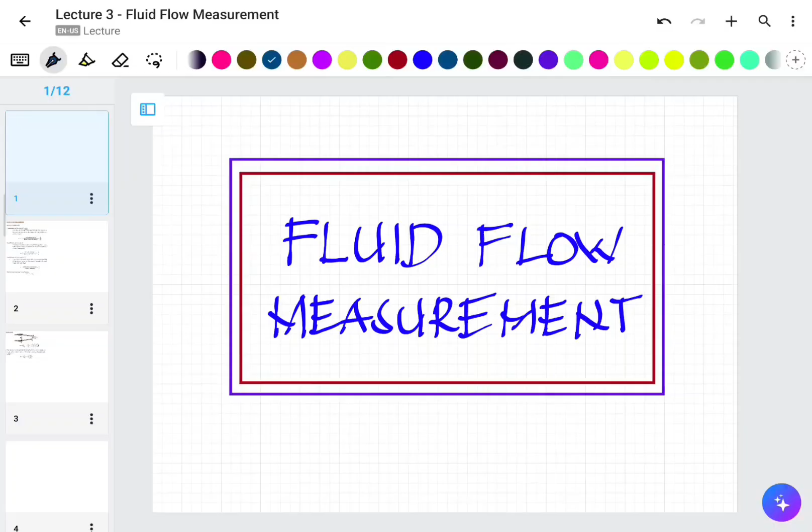For today, we're going to focus on the orifice, which is one of the many measuring devices that we use in hydraulics or fluid mechanics in general. So let's start with the concept of the coefficients, or what we call device coefficients.

First, we have what we call the coefficient of discharge, denoted as C sub D or just C. This is the ratio of the actual discharge through the device to the ideal or theoretical discharge, which will occur without losses.

Remember, when we discussed Bernoulli's energy principle or theorem, we had this key takeaway: when we talk about theoretical discharge, it is a theoretical formula, without head losses. So it's the same thing here; the Bernoulli's energy theorem applies also. That is for the coefficient of discharge.

Next, we have what we call the coefficient of velocity. Similar to discharge, it's the ratio of the actual velocity, or the actual mean velocity, to the theoretical velocity, which will occur without any losses as well.

So that's why, with the coefficient of discharge, let's go back a little bit. That is Q over Q sub T. Actually, if we want to denote this one specifically, we can also write it as Q sub A over Q sub T. So that means actual over the theoretical.

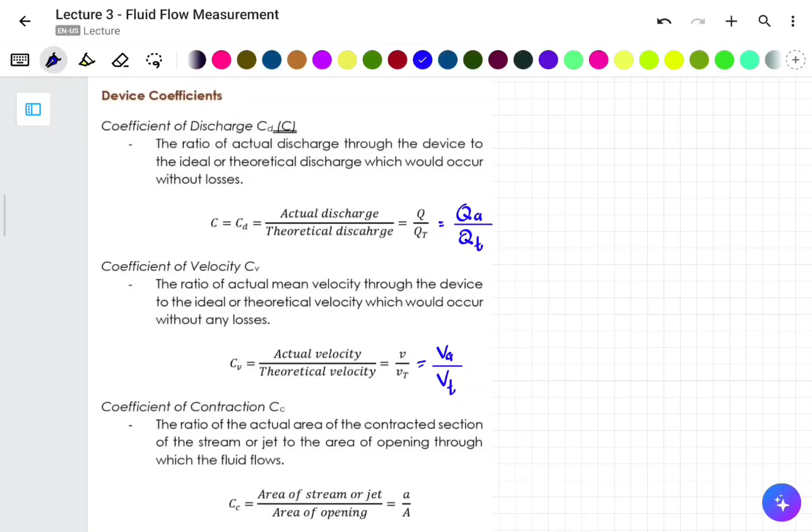So we also have the coefficient of contraction. In this case, what we are dealing with is not the actual versus the theoretical. We are dealing with how the device contracted from one point to another, and that's why it's called the coefficient of contraction. Usually, it's the ratio of the actual area of the contracted section of the stream or jet.

It's the ratio to the area of the opening through which the fluid flows. So this has to do with the area of the stream or jet, to the area of the opening.

So, area of the stream or jet, over the area of the opening. Usually, the area of the opening is much larger in relation to the area of the stream or jet. Later on, we'll discuss why that is.

So we have what we call the vena contracta, where, because of the pressure, the area becomes smaller first, then it becomes larger again at the stream or jet. That's why the smaller area, denoted by lowercase a, is over the larger A, which is the area of the opening of the device.

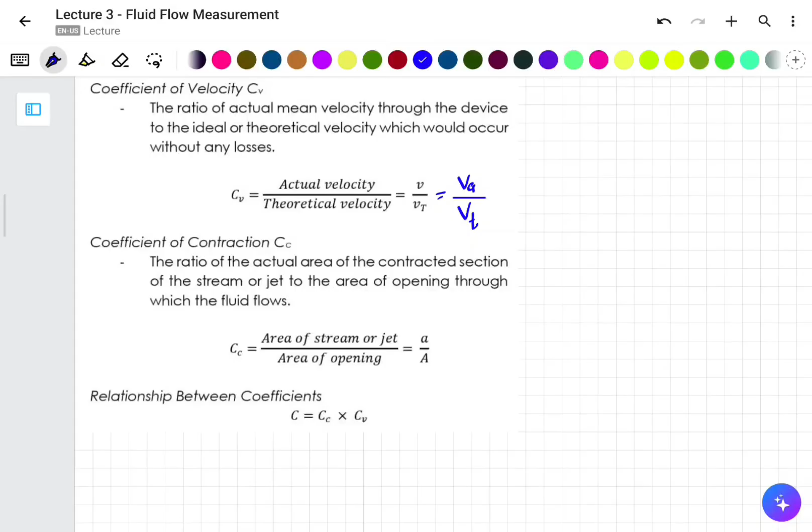So the relationship of these three—the coefficient of discharge, coefficient of velocity, and coefficient of contraction—can be denoted by this equation: C sub C times C sub V is equal to the coefficient of discharge. Actually, this comes from our concept of discharge.

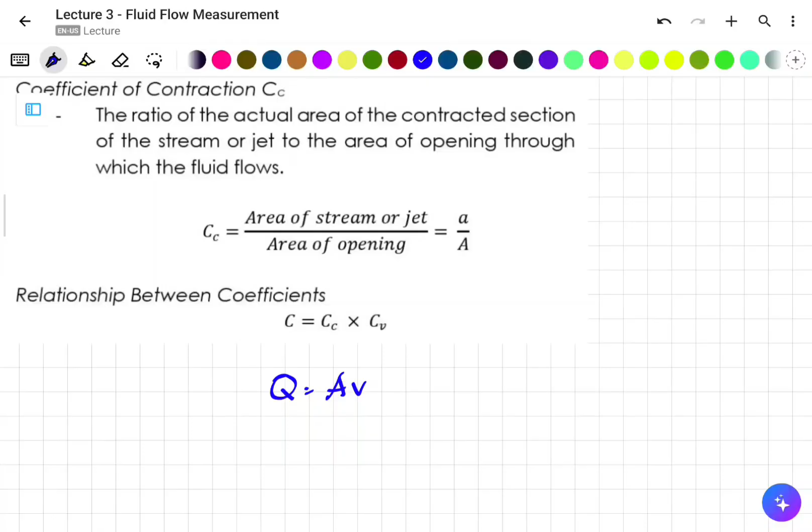What is our discharge? Remember, discharge Q is equal to the area multiplied by the mean velocity. So if you're dealing with actual over theoretical, that is the ratio. So if this is your discharge, remember this is the discharge.

This is discharge. So this one is the area, and this is the velocity. So if we're going to deal with the actual over the theoretical, we will have this.

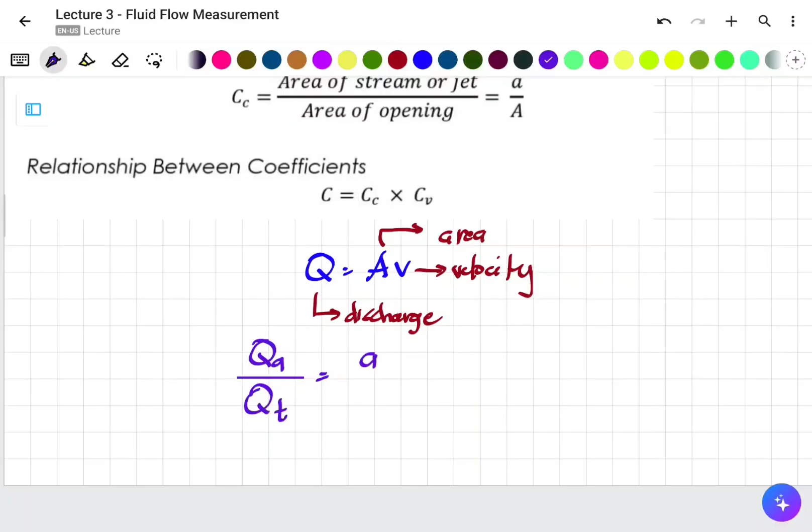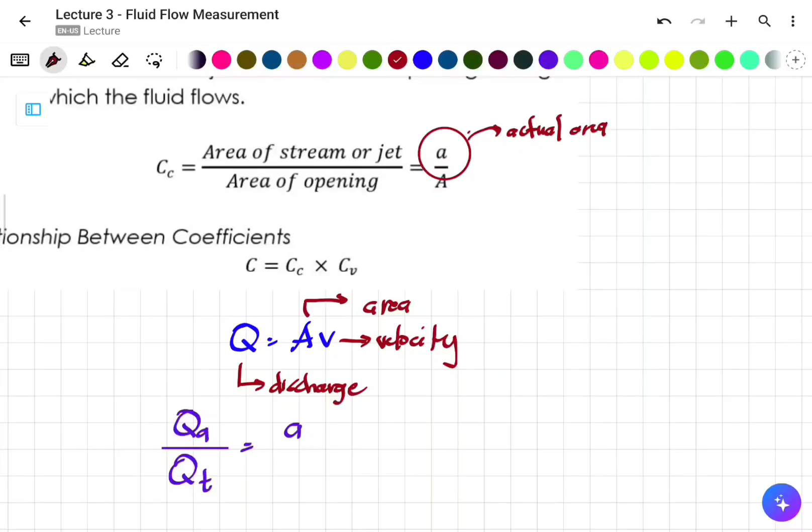Actual discharge over theoretical discharge is equal to the area. What we're dealing with is the stream or jet. The area of the stream or jet is the actual area, but it's not really the actual area—what we're talking about is the area of the stream or jet, the thing that's actually flowing, over the area of the opening. So that's multiplied by the velocity, which is actual velocity over theoretical velocity.

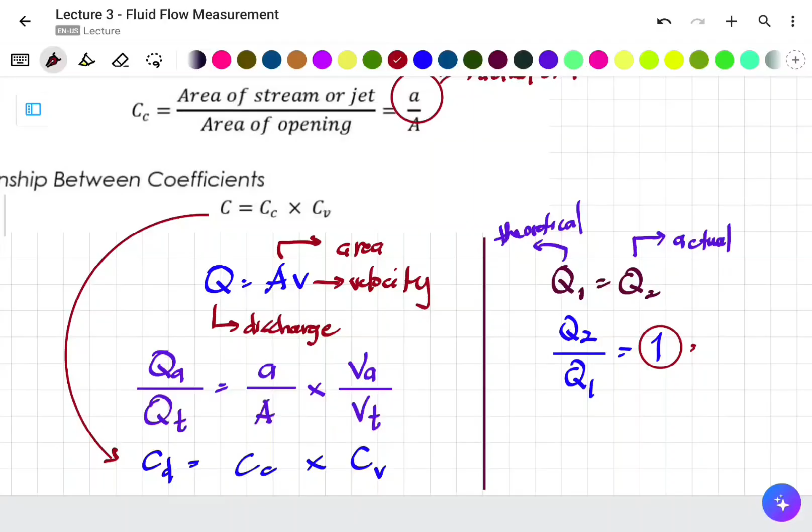So if we're going to use the equality, what happens is this: Q sub 2 over Q sub 1. Dividing both sides by Q sub 1 is equal to 1. However, this equals 1 only if the actual is equal to the theoretical. But because there's variation in the flow, what happens is this is the actual over the theoretical, but it's not always equal to 1. That's why we have a coefficient.

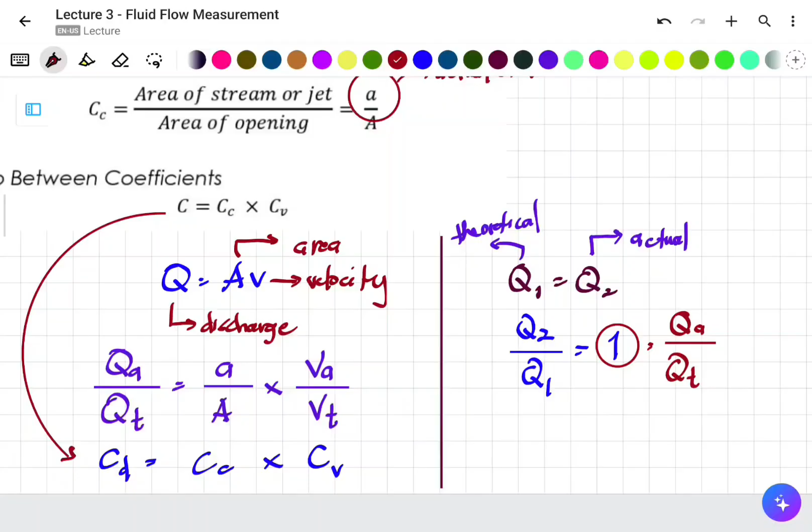But in this case, since we're dealing with the actual flow, this is critical for us civil engineers, or engineers in general, to analyze the actual scenario of the flowing fluid in pipes—especially if you're going to specialize in water resources engineering. So you need to know that. We all know that.

So that is the first part of our discussion, which is the device coefficient. Let's continue our discussion.

When you say head loss—from our discussion on fundamentals of fluid flow, we know that head loss means there's the presence of friction. On the other hand, without head loss, there's no friction. That's why when we talk about Bernoulli's theorem without head loss, we're dealing with theoretical or ideal flow. In this case, we already have the formula shown here.

This is the formula for head loss. Actually, you could use this directly, but for the sake of discussion and concepts, let's analyze this illustration. Let's take this as, for example, the flow of the fluid. Head loss can be applied to different measuring devices like the orifice we'll discuss today, venturimeters, tubes, and nozzles. So we can use this head loss formula.

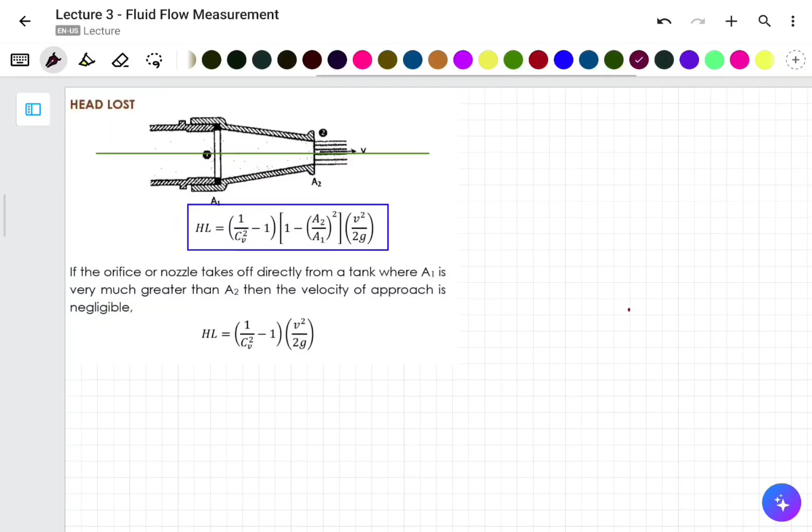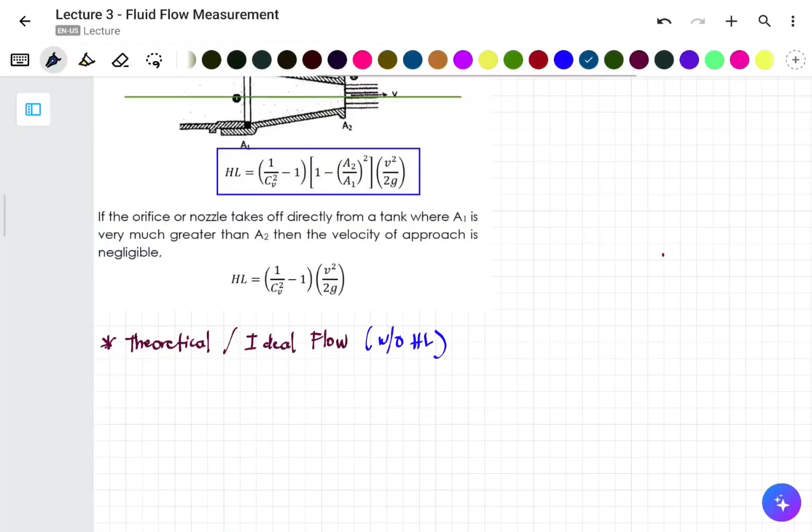However, for us to easily understand this concept, let's go back to the concept of Bernoulli's theorem without head loss. We know from our previous discussion, when we talk about theoretical or ideal flow—that's what we discussed last time. We know that this is without head loss, or frictionless.

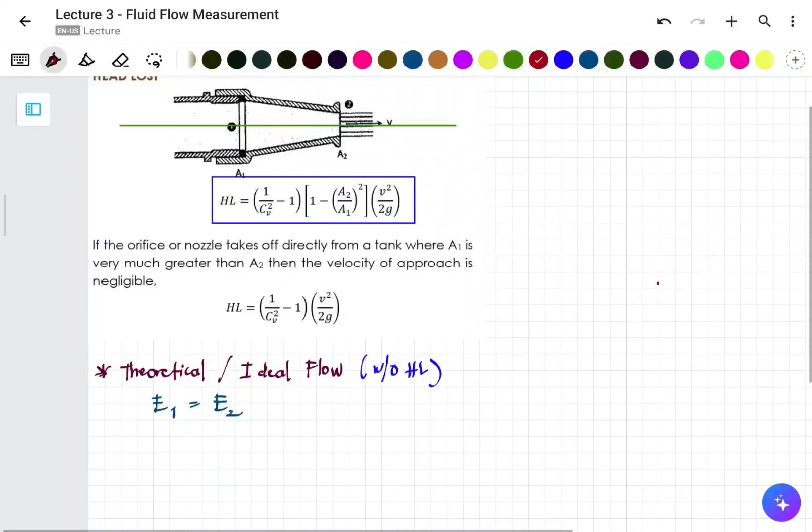Pero yung point 2 dyan, actually mukhang nasa labas na, no? Parang palabas na. So kahit pantay sila, let's say pantay yung datum nila, wag muna natin i-negate o wag muna natin tanggalin, no? Isulat muna natin parehas o both sides.

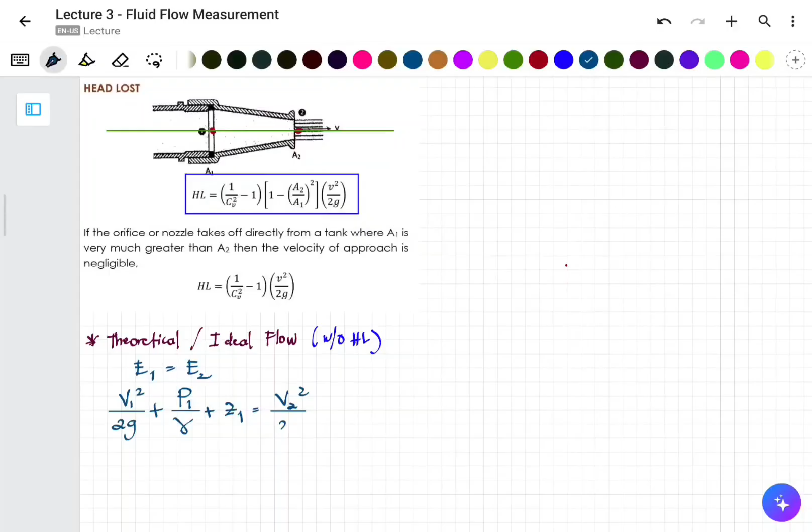Okay, so ano nga ulit yung equation kapag ganito, no? So this will become V sub 1 squared over 2G, plus P sub 1 over gamma, plus Z sub 1 is equal to V sub 2 squared over 2G, plus P sub 2 over gamma, plus Z sub 2.

So yung elevation o elevation energy head, wag muna natin i-cancel out, kahit alam naman natin, you know, pantay sila. Wag muna natin i-cancel out kasi pwede kasing hindi ganon, no? Pwede hindi ganon, okay?

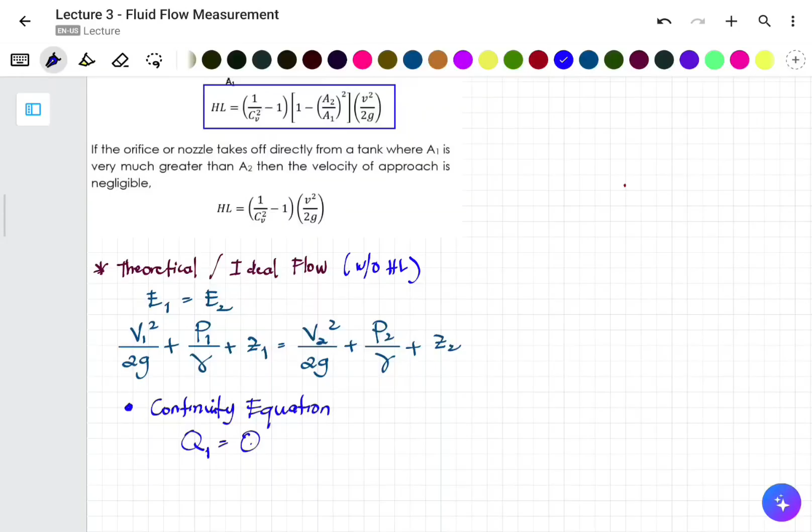So, but we know, from the continuity equation, so let's go back a little bit from our previous discussion. From our continuity equation o continuity principle of fluid flow, we know that whatever enters the system is the same amount that leaves the system. Okay? So alam natin yan.

And that is true volumetric flow rate. So if that's a volumetric flow rate, that is A sub 1, V sub 1 is equal to A sub 2, V sub 2. Okay?

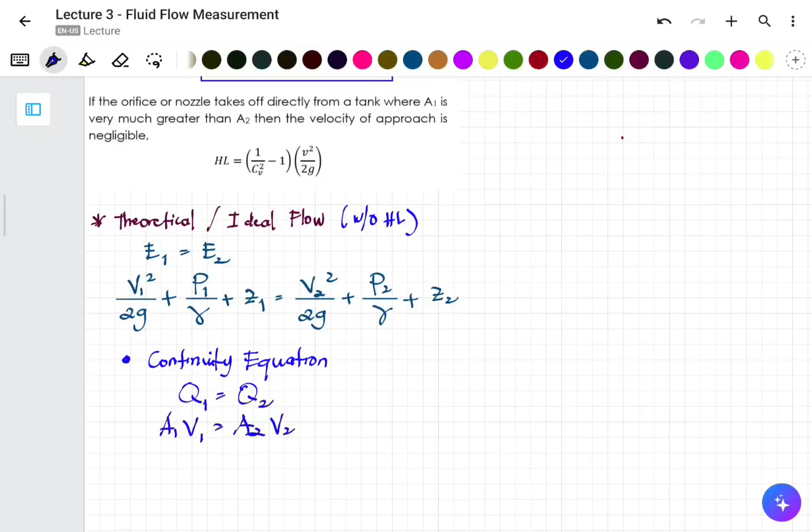So in this case, we want to see o we want to know the value of V sub 2. Ang dahilan, itong V sub 2 ay magiging indicating factor para sa ating discussion. Itong point 2 na to, dito natin ma-analyze kung ito ay actual, o pwede rin natin tanungin kung ito ay theoretical.

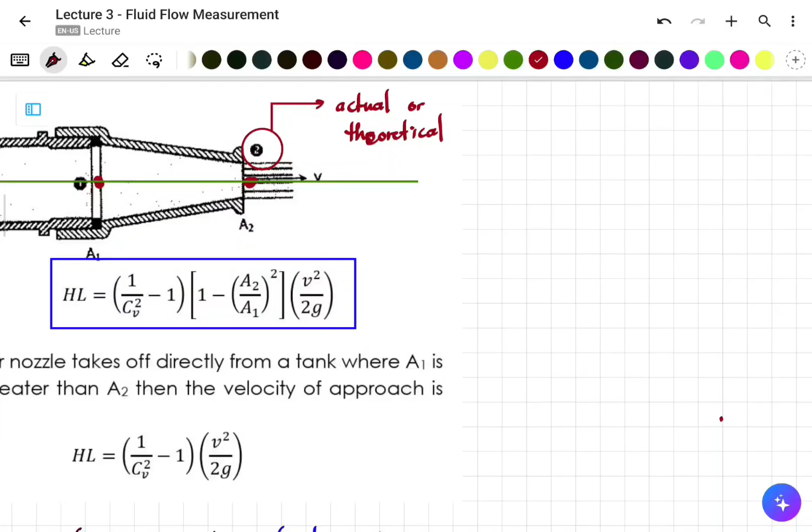Dito naka-base, no, yung ating ina-analyze. So syempre, palabas sa system. Okay, so yun yung importante naman, di ba? We know that from our discussion on continuity, meron tayong concern sa amount na nalalabas. Kaya nga we are dealing with volumetric flow rate, mass flow rate, or weight flow rate.

Okay, so balik na tayo dito. So if that's the case, let's have the ratio, o let's take from this equation the value of V sub 1, kasi yung V sub 1 natin nandun sa system. So this will become A sub 2 over A sub 1 times V sub 2. Ito yung ating V sub 1 na value.

Okay, so substituting natin dyan sa equation na to, lalabas, no, kung i-simplify natin, kung naka-squared yon at itong buo na to, di ba, itong buo na to yung inyong numerator. Nakita nyo ba yon from our equation na to? Kung buong yan yung numerator natin, squared natin yan.

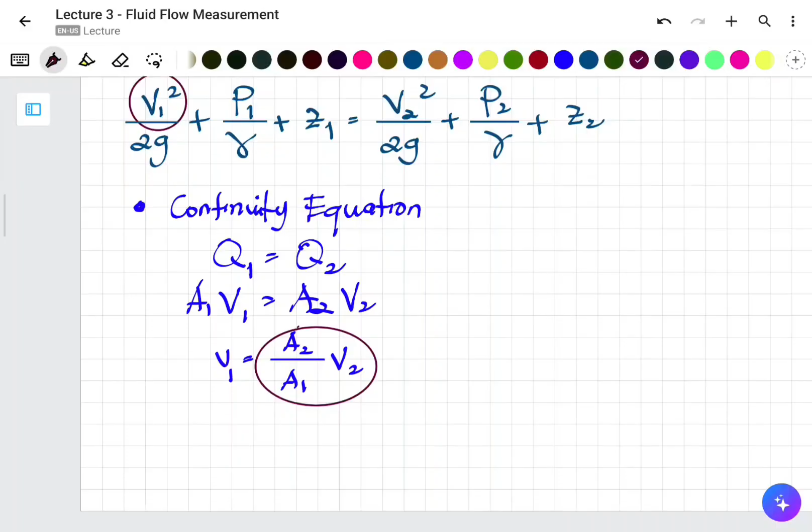So that means lalabas, this will become, i-simplify na lang natin. This will become A sub 2 over A sub 1, naka-squared. Okay, ayusin natin. Naka-squared. Then multiplied by V sub 2, V sub 2 squared over 2G. Kasi ang square lang naman natin yung etong A sub 2 over A sub 1 times V sub 2.

Then tuloy lang yung equation plus P sub 1 over gamma, plus Z sub 1 is equal to, yun pa din, no, V squared over 2G, plus P sub 2 over gamma plus Z sub 2. Ayan yung ating equation na gagamitin. So again, this is for the theoretical or ideal flow.

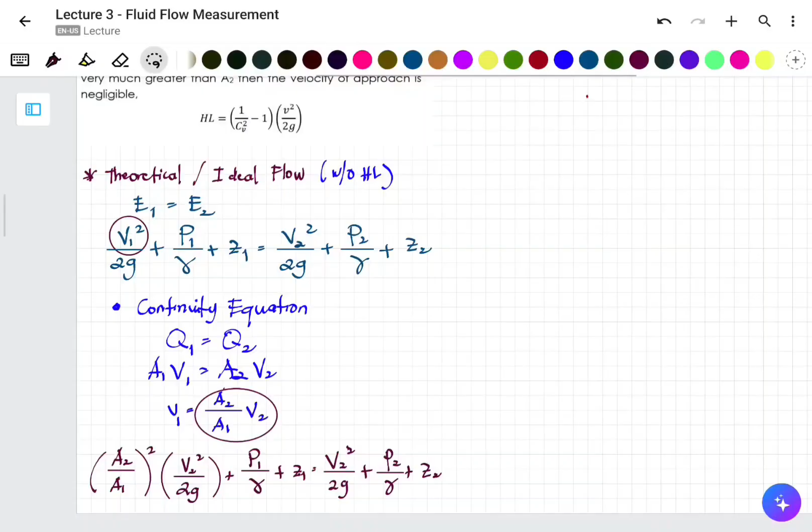So pwede natin gawin, i-simplify natin itong equation na to. So sige, dalhin na lang natin siya dito sa bandang taas. Okay, para medyo maayos. So ituloy natin, gawin natin, pagsamahin natin yung pagkakamukha, no?

So lalabas, pwede ba natin gawin ganito? Isulat muna natin. So this will become V sub 2 squared over 2G, minus ito, no? So this is A sub 2 over A sub 1 naka-squared multiplied by V sub 2 squared over 2G, is equal to, since pinagpalit ko, lumabas parang pinagsama-sama ko yung like terms. This will become P sub 1 over gamma, plus Z sub 1, minus P sub 2 over gamma, minus Z sub 2.

So by regrouping and factoring the variables, pwede natin i-simplify ito further by writing into this form: V squared over 2G, V sub 2, multiplied by, ano yung naiwan dito? This will become 1 minus ito, yung naiwan, so A sub 2 over A sub 1 squared.

Okay, yan yun. Then is equal to, so pwede natin i-factor out yung P sub 2 minus over gamma, minus Z sub 2. So this will become P sub 1 over gamma plus Z sub 1. Anong ulit to? So this is potential energy, kaya hindi ko na pinag-iwalay.

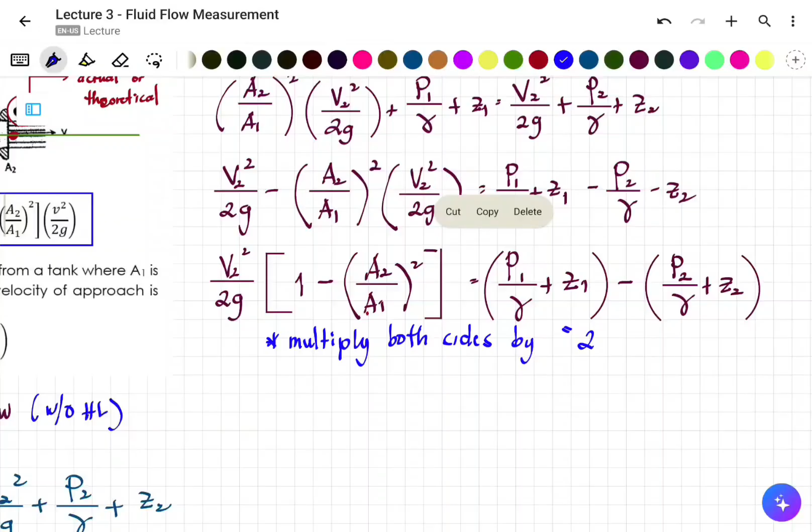Final na ba? Ano ba yung kukunin natin ulit? V sub 2. So kung i-simplify natin to further, multiplying both sides by 2g. Ano pa yung gagawin natin? Una, we're going to multiply both sides by 2g. Ano pa? Divide both sides nito, divide both sides by yung 1 minus a sub 2 over a sub 1 squared.

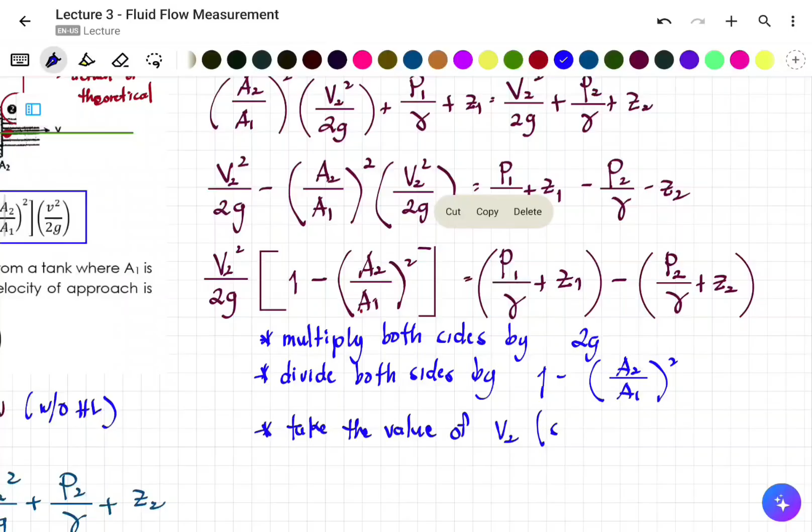Ano pa? So kapag na-divide na natin both sides at na-multiply natin both sides, nung value na kailangan natin, ganyan na natin to. So kapag na-multiply na at na-divide na, kunin natin yung square root. So take the square root. Take the value of V sub 2 by using square root. So ayan yung ating mga gagawin. Kapag sinunod natin yung steps na yan, ganito na mangyayari sa equation natin.

So this will become V sub 2. Gawin natin kulay, parang maroon. V sub 2. So this V sub 2 is your velocity. Take note, this V sub 2 na makukuha natin is a theoretical velocity. Why? Because we're using theoretical and ideal flow.

So anong ginawa natin? Both sides by 2g. Mamumultiply ng 2g, then madidivide both sides nito. So pwede ba ating gawin na ito, lalabas ito na 2g over 1 minus a sub 2 over a sub 1 squared, multiplied na ito sa ating P sub 1 over gamma plus z sub 1. Naka-multiply pa pala ito ng buo.

Minus P sub 2 over gamma plus z sub 2. Pero naka-multiply yan dun sa ginawa natin, sa 2g, and naka-divide sa yung mahabang equation na yon. Pero may square root, wag kalimutan. Mahabang square root. So ito yung ating theoretical velocity. Take note, itong kinompute natin, this is our theoretical velocity. Why? Because we use theoretical and ideal flow ng ating Bernoulli's energy theorem.

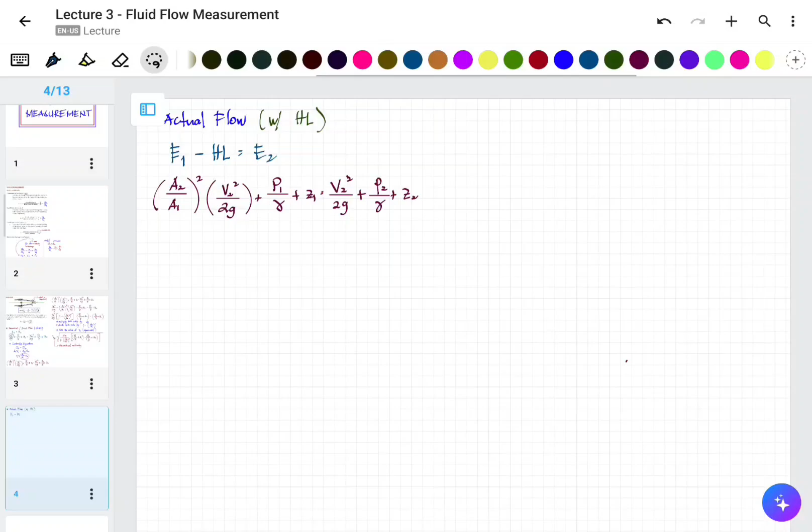So pag i-simplify ulit natin, lalabas ito rin yun, pero usod natin, gawin natin kulay na to, blue. Pero kailangan meron siyang... okay, merong head loss. So minus head loss is equal dyan. Diba yun yung ating equation? So by simplifying further, mangyayari, ganito din pala.

So lalabas dyan. Paano mangyari? Pag nilipat natin sa kabilang side, ito rin, ito din pala yun. Same na same. Ilagay natin to. Same na same, so ito rin pala. Kunin natin to. Same na same. Same approach. Kinuha ko na lang para parehas na parehas.

Ang problema, yun nga lang, mukhang may madadagdag doon sa ating equation. Ano yun? Ating kulay blue para magkaiba. So mangyayari is magkakaroon dito ng minus head loss, dito rin minus head loss. Ayan na yun, actual flow na yan with head loss na. So ganun ulit, same procedure, ito pa din.

Multiply both sides by 2g. Divide both sides by this value and getting the square root, para ma-simplify natin yung V sub 2. In this case, yung V sub 2 naman na kinocompute natin dyan is actual na. Actual V sub 2. So mangyayari, kunin ko lang din to.

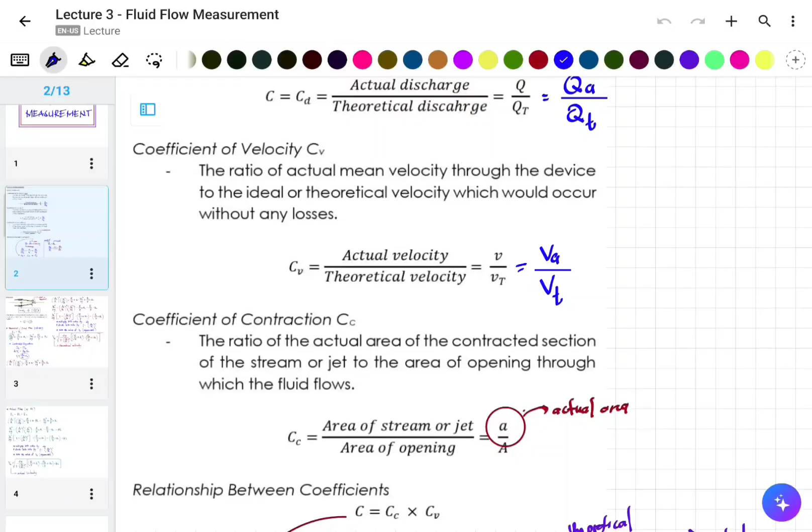Okay, medyo madugo yung ating calculation. However, if you still remember sa ating kaninang pinag-usapan, balik tayo doon. We know that the ratio between the actual velocity and theoretical velocity is what we call the coefficient of velocity. Since we are dealing with measurement and we are dealing with coefficients, gawin natin is from our coefficient.

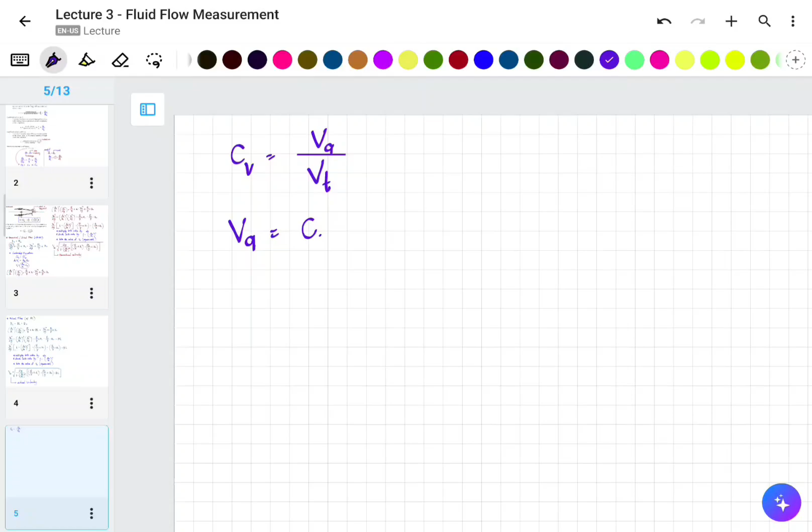C sub V is equal to actual over theoretical velocity. So para makompute natin yung head loss, gawin natin, V sub A is equal to C sub V multiplied by theoretical velocity. Di ba meron na tayong values nun?

Kunin natin dito. Ito, gawin natin itong red na V sub 2, this is your theoretical. I-write na lang natin dito. Yan, paste. So this is your theoretical. Medyo usod natin lang. Then kunin natin yung actual. Ito.

Palitin natin to sila kasi masyadong malaki. So yung red, na writing, yan yung ating theoretical, at yung ating blue, yung ating actual. So paano natin ito i-represent para medyo madali nating tignan dun sa ating problem.

Ngayon, i-denote na lang natin na yung ating actual. Maglagay tayo ng note dito. Yung designation natin actual, gawin natin siyang V na lang, and this is your actual velocity. I-denote na lang natin ng ganyan para mas madali sa atin, kasi pag medyo may letter, baka malito. So gawin natin is, alam natin ito, theoretical - sorry, this is your actual, and this is your theoretical.

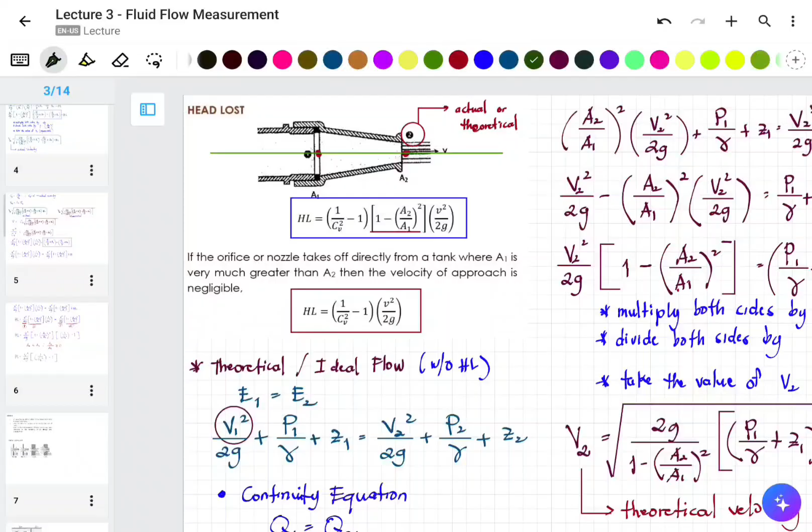Okay, so that is for our discussion on head loss. Now let's discuss orifice.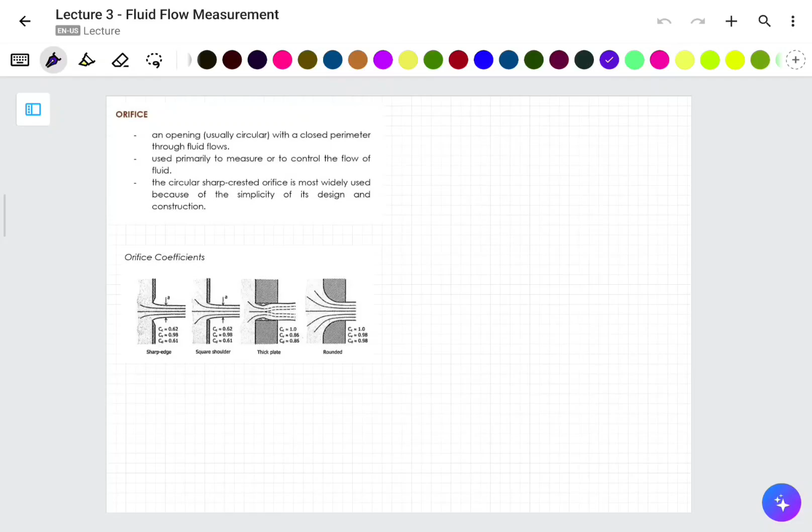The widely used type of orifice is the sharp-crested or sharp edge orifice. Here you can see their coefficients: C sub C, C sub V. They're not exactly equal, but approaching 0.62 for coefficient of contraction, 0.98, and coefficient of discharge is around 0.61. These are not constant values.

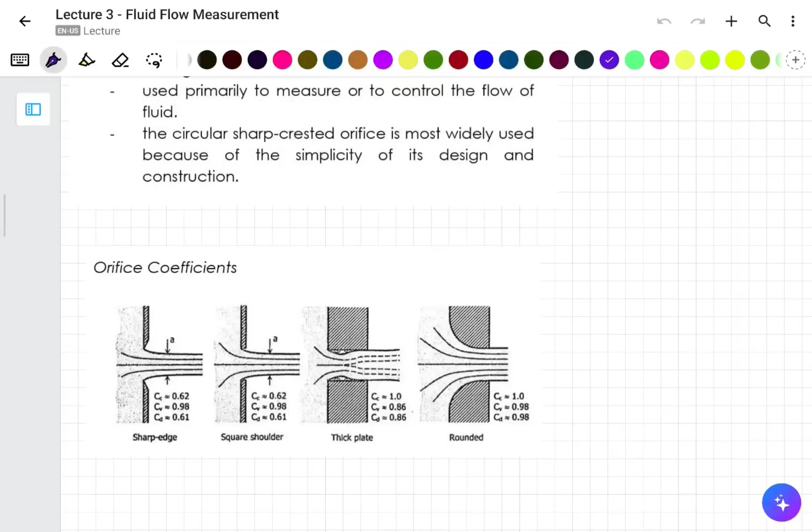There are corresponding diameters, and studies have been made proposing tables of values, but as I've said, these are not constant — they can change. Eventually, those values will still conform to our continuity equation, Bernoulli's energy theorem, and can be measured through pressure differences using a piezometer and manometer. Either way, we can use the concepts we discussed, which are the head losses and the coefficients.

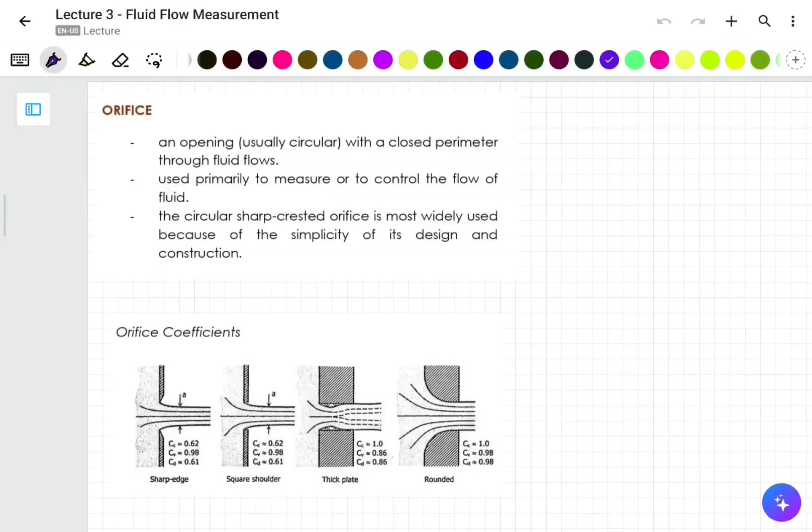So those are our orifices, and this will be one of the measuring devices we focus on, aside from the venturi meter, tubes, and gauge, which will be discussed later as we go along with this topic.

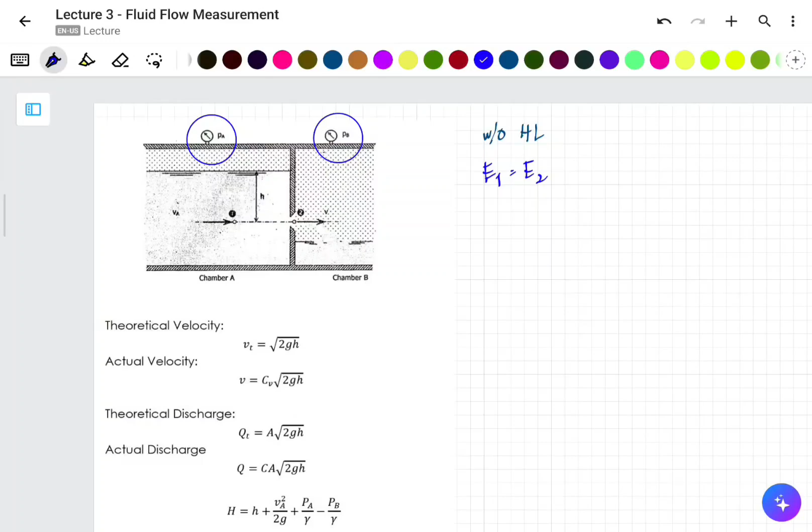However, there's a presence of pressure. We have pressure readings P sub A and P sub B because this is a chamber setup, with presence of air or gas above the fluid. There's also a height difference from the free surface down to the portion of the orifice, at point 2 of our analysis.

Considering that setup, let's write our usual equation: V sub 1 squared over 2G, plus P sub 1 over gamma, plus Z sub 1. Since it's equal, it's the same, just with different designations. Let's define this as we compute for the possible values we can find from this problem.

In this case, as shown on the left side, we have theoretical velocity, actual velocity, theoretical discharge, and actual discharge. Let's derive these. From this setup, let's consider point A as point 1 — so this is our point 1, located at point A.

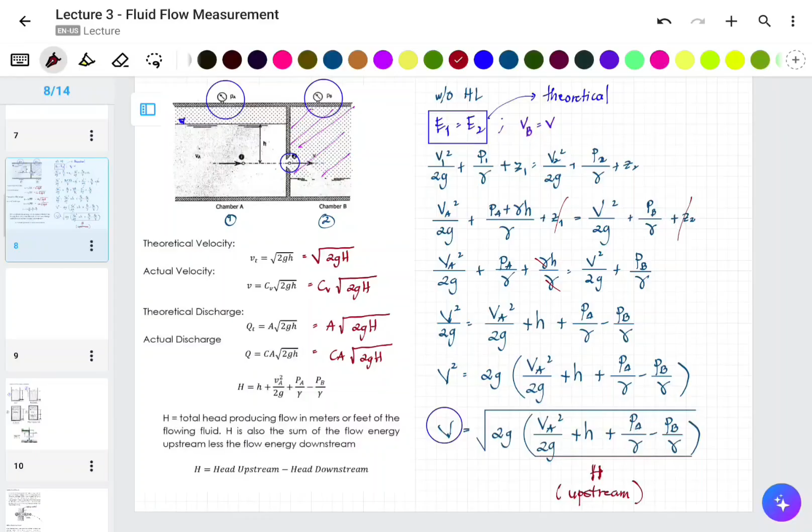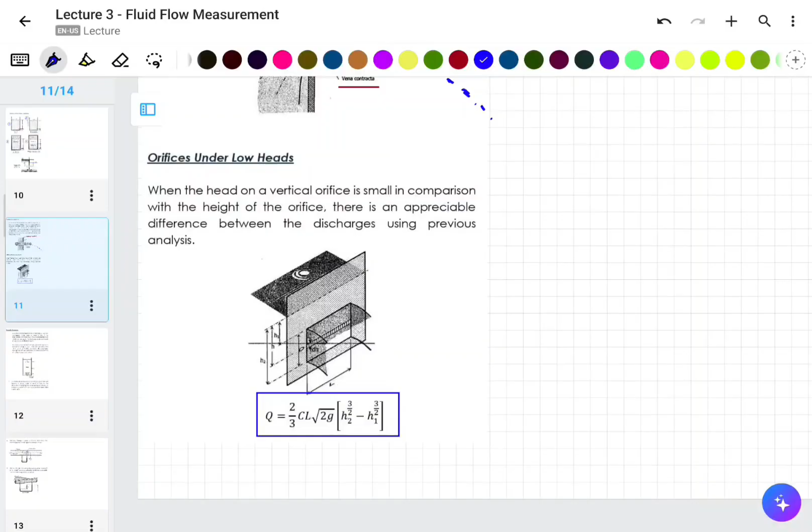So may nagkakaroon ng maliit na difference sa solution. Dito pinakita kaagad ang formula kapag orifices under low heads. Ito na yung formula, parang katulad nandun sa inyong head loss. Pero paano na-derive yan, yung equation na yan? Titingnan natin yung figure, ibabangga natin sa concept na meron tayo.

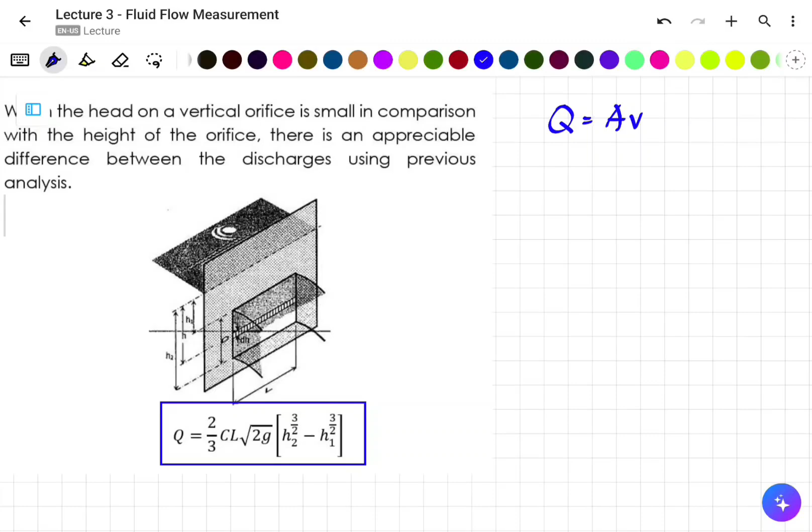Kung naaalala natin sa ating discussion, Q is equal to AV, ang volumetric flow rate. Since dealing tayo sa appreciable difference, magkakaroon ng differential values. Kaya gagamitin natin dQ is equal to dAV.

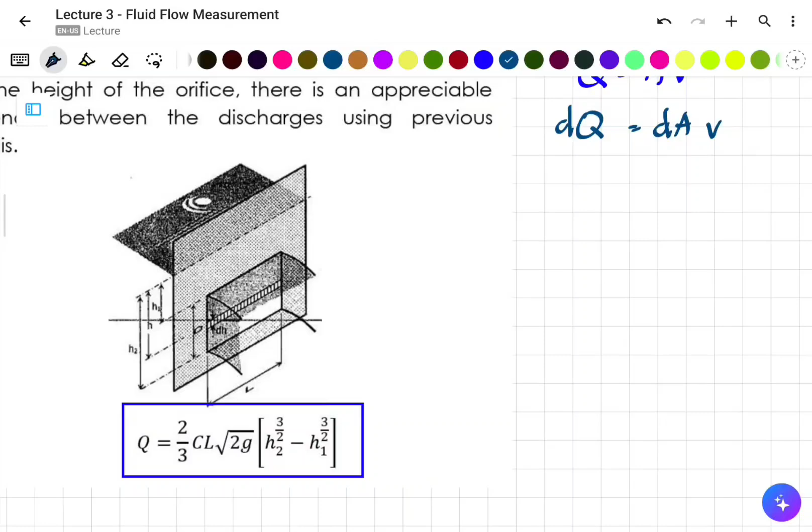Nakadepende ang inyong discharge sa area, which is evident dito. Nakadepende yung discharge dun sa area. Pero yung area na tinutukoy natin dito ay ang area caused by the length ng orifice, itong butas na to. Then the height difference ng dalawang fluid, nakikita niyo yung H1, H2, at so on.

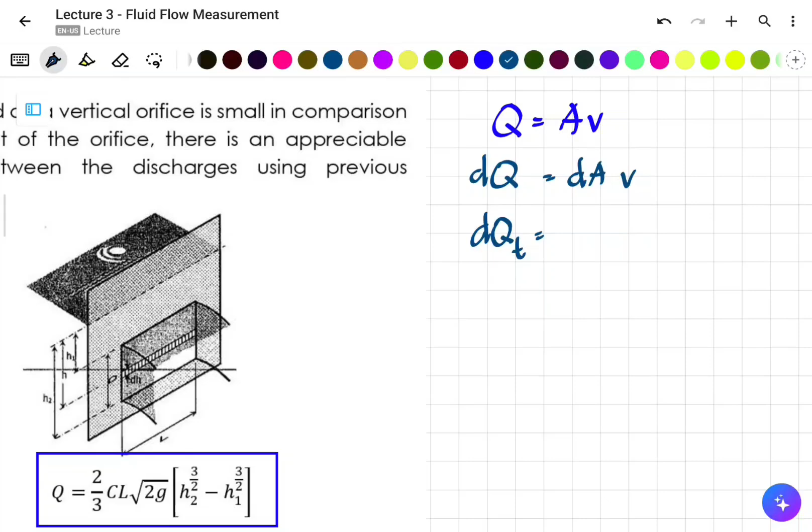So mangyayari, gawin natin itong theoretical (T) kasi wala tayong nilagay na head loss. Sabi natin yung A ay length times the height, pero sa case na ito, length times the difference in height, kasi appreciable difference between the discharges or height ay small in comparison with the height of the orifice.

Ito yung binanggit ko kanina. Kaya nagkakaroon tayo ng difference in discharges which is caused by this comparison of height. So yung V natin, which is theoretical, ay square root of 2GH. Maliit lang kasi yun yung ginamit dun sa illustration natin.

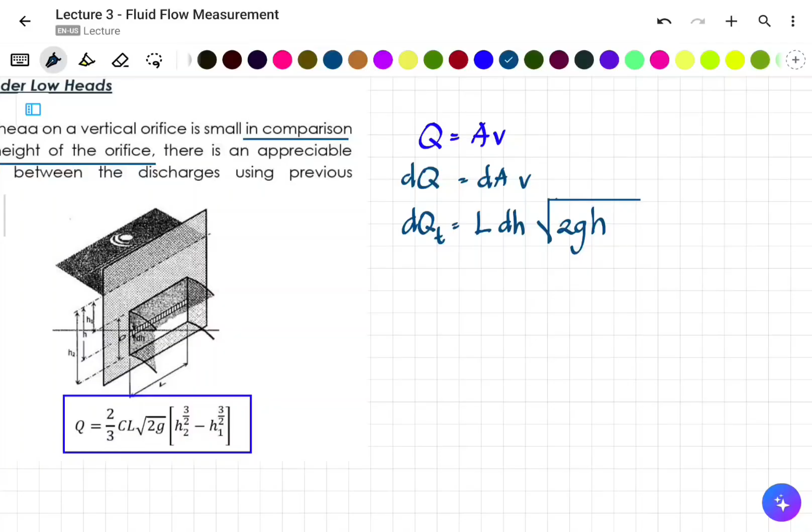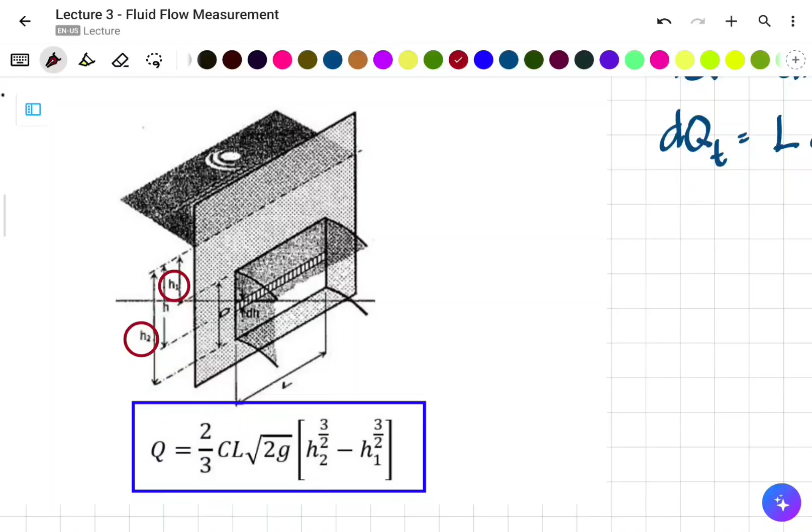Okay, paano to ngayon? Kunin natin, let's take or operate from limits natin, from H1 doon sa umpisa, kasi yung sa kabilang side papuntang H2, mas mababang level. Nakikita ba yun? Ito, H1. Papunta doon sa mas mababang level na H2 sa kabilang side, parang kasi siyang isometric, medyo may thickness, naka-3-dimensional yung ating drawing.

So let's simplify. Ito magiging dQt, kasi differential. Gawin natin L, tapos square root of 2G - iwalay na lang natin, times square root of 2G. Tapos H raised to 1/2, times dH. So may i-integrate na tayo nito.

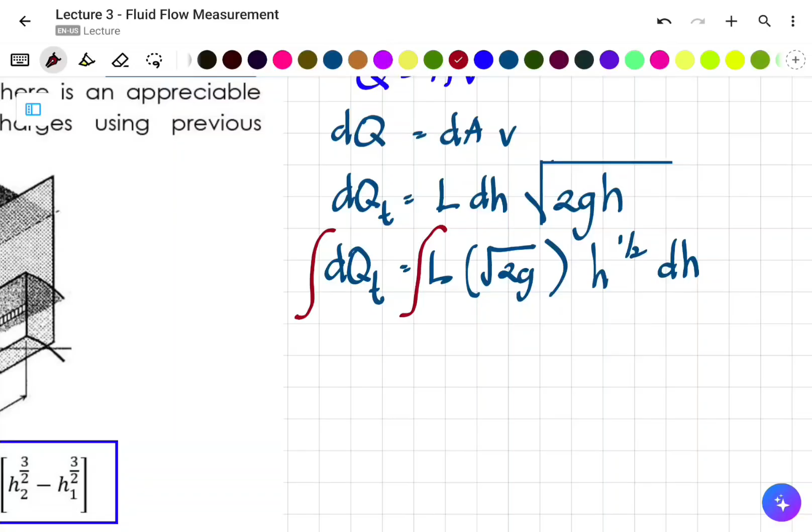Ano yung integration ng Q? From 0 to QT, kasi from discharge to walang discharge. And then this is from H1 to H2.

Simplifying that, this will become discharge, theoretical, is equal to constant. Pwede natin itong ihiwalay o ilabas na - integral constant, square root of 2g times L, walang square root yon. Then since alam natin may limit siya, this will become h raised to 3 halves.

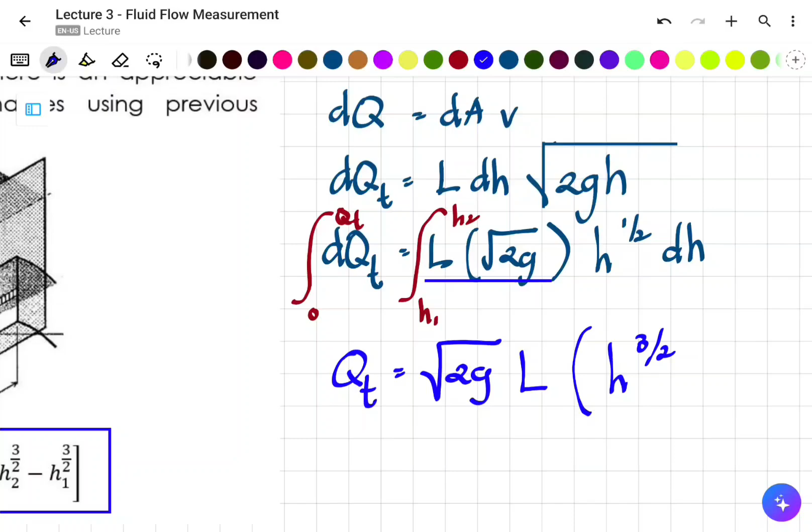H raised to 3 halves ba? Kulang, babaliktad - H raised to 3 halves over 3 halves. Ang limit natin is from h sub 1 to h sub 2.

Pag sinimplify natin to further, this will become q sub t is equal to square root of 2g times L, hindi siya naka-square root ha. Then ito magiging 2/3. So this will become 2/3 h raised to 3 halves. Pero dahil h sub 2 yung una, h sub 2 minus 2/3 h raised to 3 halves, yan yung h sub 1. So by principle of factorization, pwede natin i-factor out yung 2/3.

So, q sub t is equal to 2/3 square root of 2g times L multiplied by, pwede ba ito i-factor out? Hindi, h sub 2 raised to 3 halves minus h sub 1 raised to 3 halves. So ito yung ating equation para dyan, nakikita nyo ba? Kamukha ng ating sa theoretical.

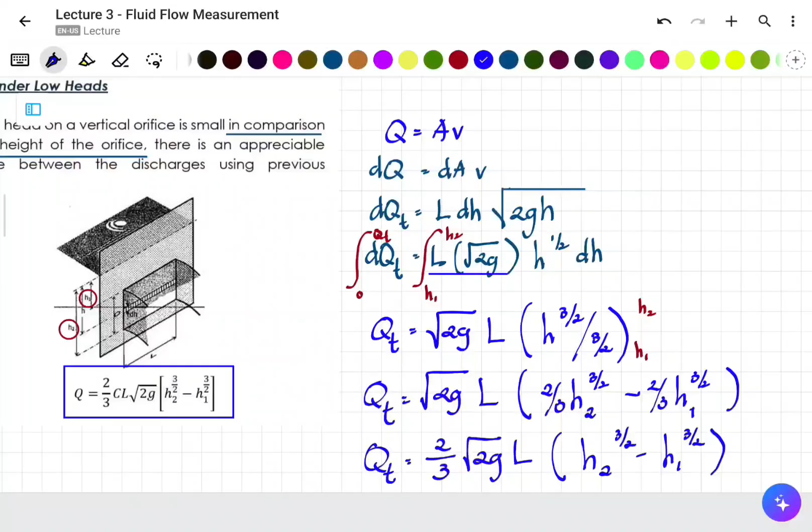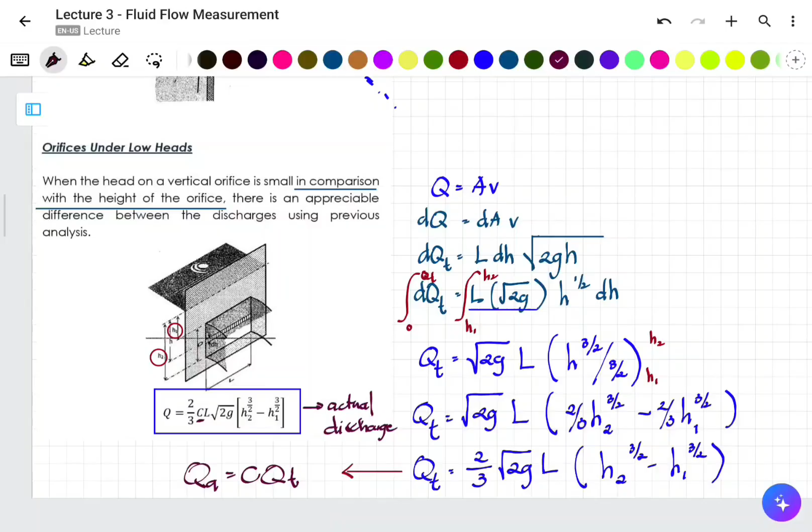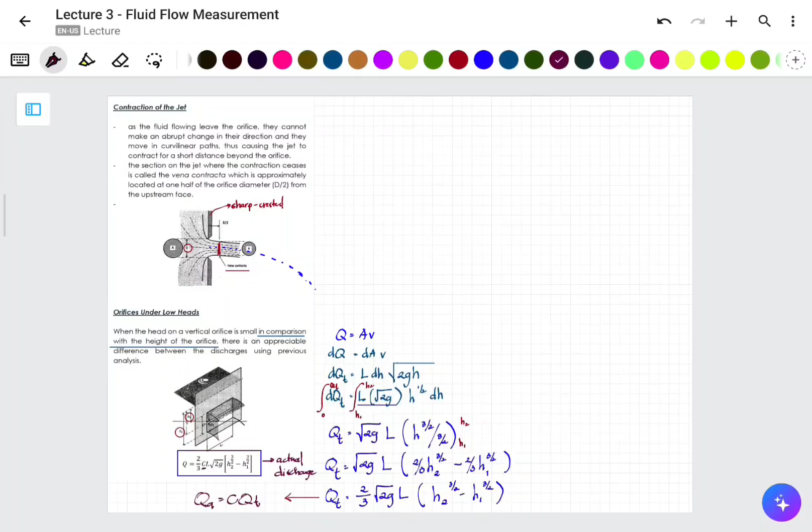Take note, theoretical ito. Ngayon kung gusto natin gawing actual yung ating value, i-multiply lang natin siya sa coefficient. Kung gusto natin gawing actual yan, actual is C multiplied by the theoretical. Kaya meron siyang C dito - take note, this is actual discharge. Usually actual values yung hinahanap natin, just like the velocity and the discharge. Kaya tayo nagkakaroon ng coefficient. That's it for the concepts and principles behind the orifice.